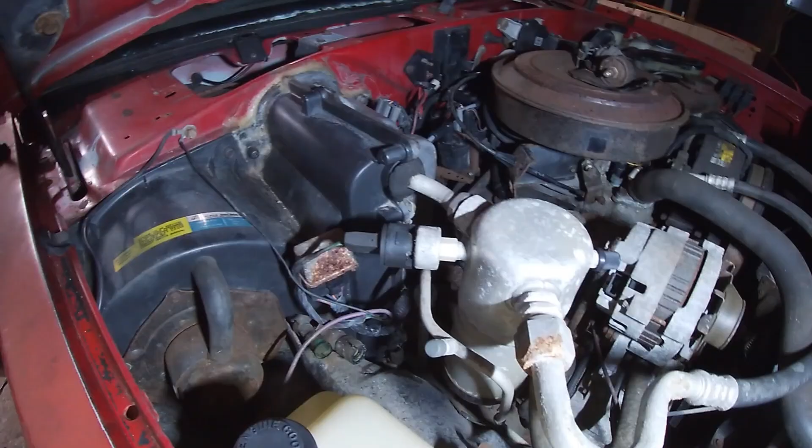Let's get to it. So I'm going to start on this heater core replacement. I've looped the one hose and I noticed a couple things. One, the bottom hose there, the clamp, the screw part of it is pointed down towards the inner fender. So I don't know how this guy got this heater hose on, or the factory did. It makes no sense to me.

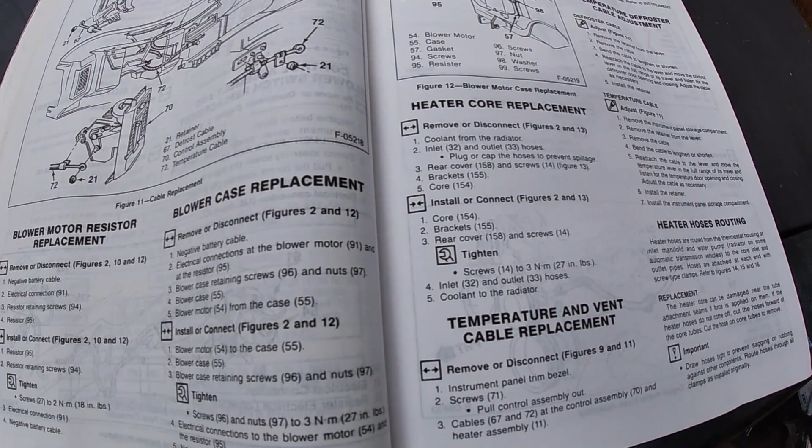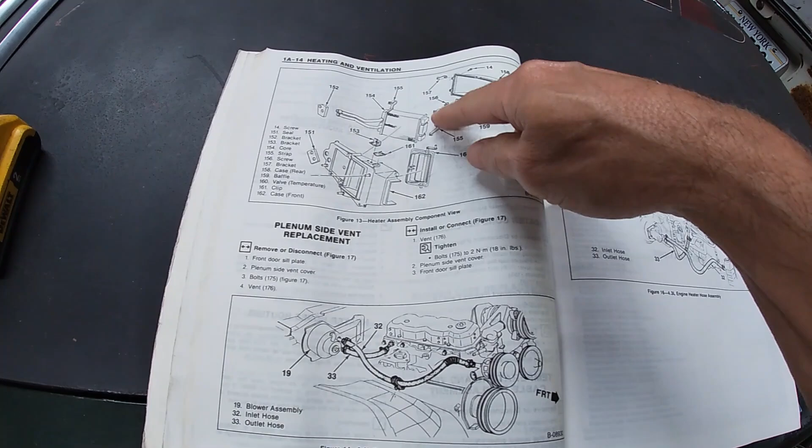Second thing is, I'm going through the manual just to make sure I don't miss anything. Heater core replacement: coolant from radiator, inlet hose, outlet hose, blah blah blah. Rear cover, screws, brackets, core. So when we look at the picture, remove the rear cover. This is the front of the vehicle. The brackets, the heater core. Simple. I'm not sure if they're forgetting something, but...

If this is the cover in the diagram, it's straight up and down. So, I mean, obviously the core is right there, behind there, but this dash comes down awfully low. So, we'll see what happens.

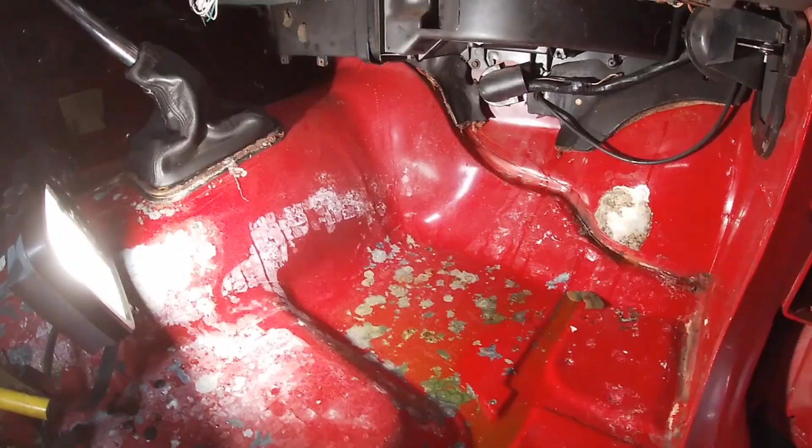Yeah, it quickly became apparent how naive and stupid I am. There's no way to get this out without either taking the dash out or accessing it through, there's an access door, you just unscrew that. But I watched a couple videos, and the 2 bolts that you need to get to by taking out that access door are not very accessible once you take that door off. One's down to the right, one's down to the left, kind of behind the radio.

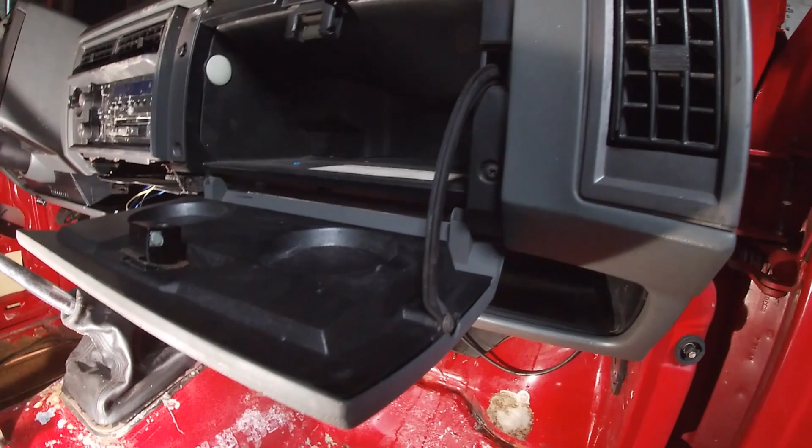So like I said, I watched a couple videos, and some people were taking out the radio. Some people were taking the dash out. And then some people were saying, oh no, it's easy, you just take the top of the dash out, drop the steering column, which involves taking all those panels off under the column, and then you can pull the dash away, but I imagine you have to unbolt it because there's a bracket here. And then we're like, oh yeah, don't forget unhook the ECM as well on this side. And then other people were chiming in the comments that they forgot steps.

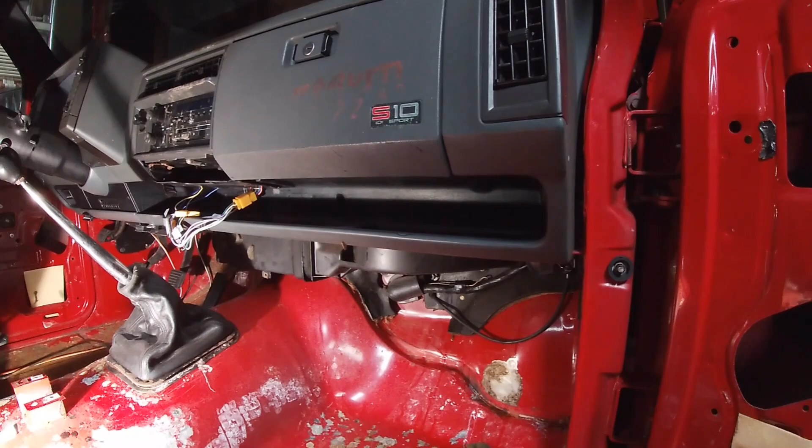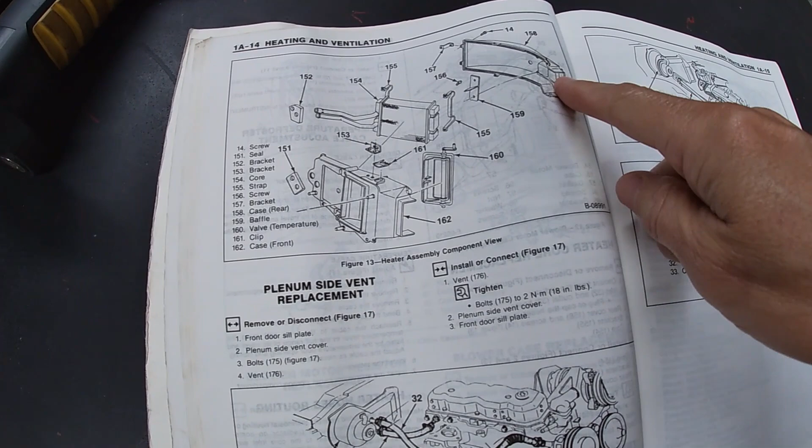So yeah, I'm gonna take that panel off inside the glove box and see what I can see. I mean, maybe I was expecting way too much than the procedure that just says take the cover off, take the 2 brackets off, take the heater core out. Done. I mean, I figured it was kind of behind stuff, but you know, they should probably mention, you know, remove the dash. What's the best way to remove the dash? What do you have to do? Do you have to unplug the ECM and drop the steering wheel? No mention of that whatsoever.

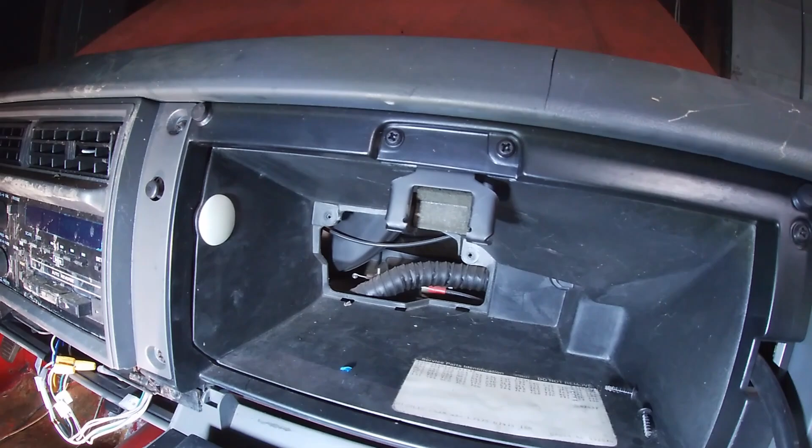There's the first one under the hose above the cable. And the other one is allegedly right down there behind the radio. I don't know what the point of this access door is. Alright, let's see if I can get these out.

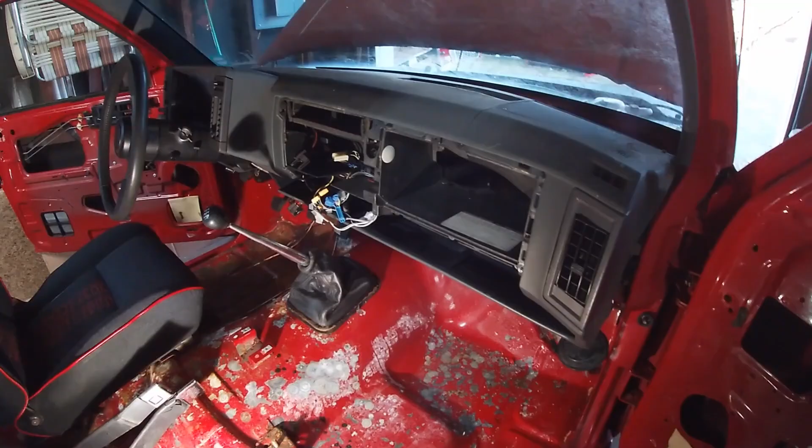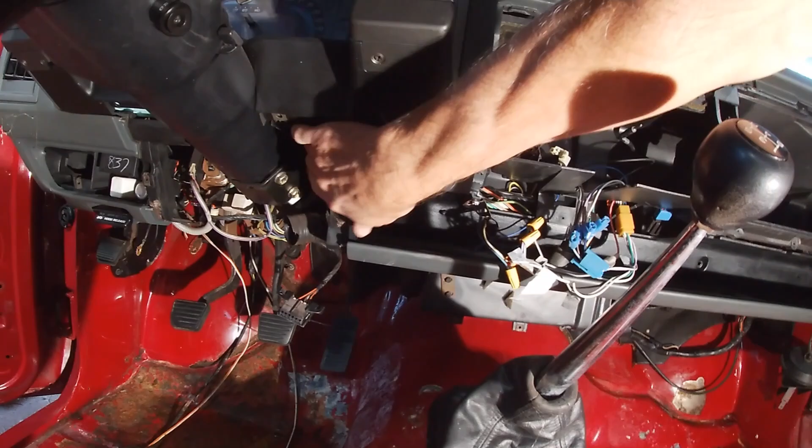In the center. Of course, I removed all the plastic on the bottom, and all of this, I had to take the radio out and all this stuff. All of this was to get the 2 bolts that you can't get to from going up underneath here to get that heater core out. Plus you need the room because when you take the cover off, it needs to clear the heater core.

So there's 1 bolt right behind the radio here on the right side of the radio. So that was easy enough to get to once you took the radio out. There's a bolt over there, which is hard to see. I think it's showing up on camera. It's right there where the bolt hole is because I have the cover off already. So basically you take this panel off in the back of the glove box, and that gets you access to nothing.

After removing all these bolts, I was able to pull the dash forward and push it down, and that exposed that nut, that bolt.

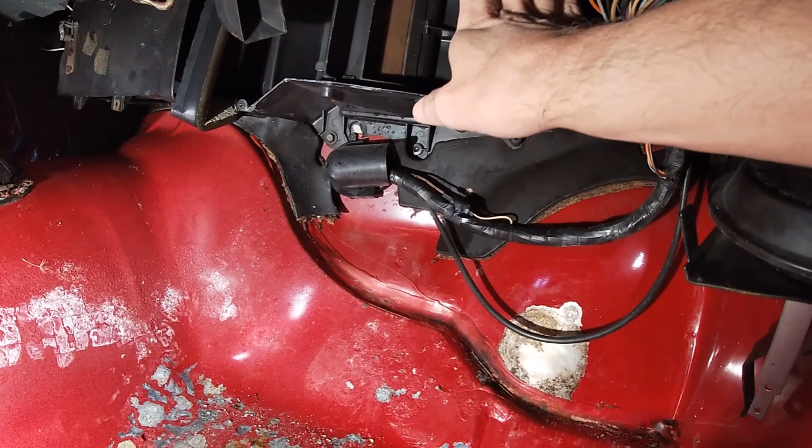When it came time to remove the heater core, you have to pull the cover out far enough to clear the heater core. It's stuffed inside the vent on this side, so you can't pull it out this way—you have to pull it from the right hand side. This vent actuator was in the way, so I took that off, and then it came out and I was able to drop it down.

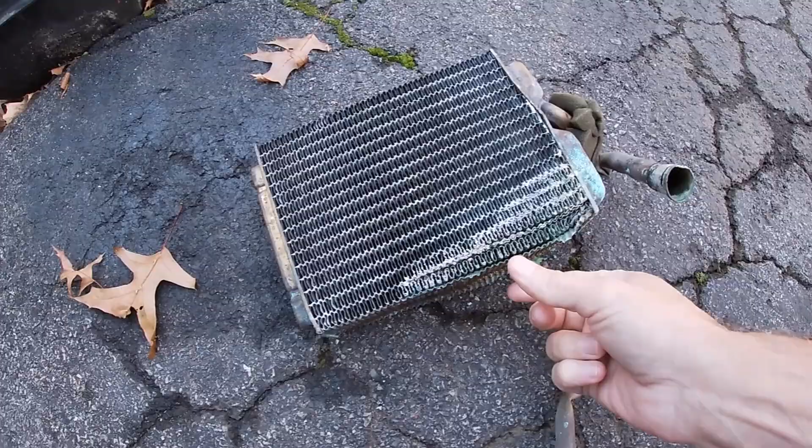I quickly realized the heater core was beyond repair. I was going to try to fix it, but the bottom had just fallen out of it—it was completely exploded. And this one tube, I don't know how it was put in, but the clamp, the nut side, was down on the inner fender. So I ended up pulling the heater core through and just cutting it off.

I also realized that when I bought this, the passenger side carpet was soaking wet, and I thought one of the windows must have been leaking, but there was no evidence of water coming in through the door, on the door panel, or over the dashboard. So I think that heater core had exploded at some point.

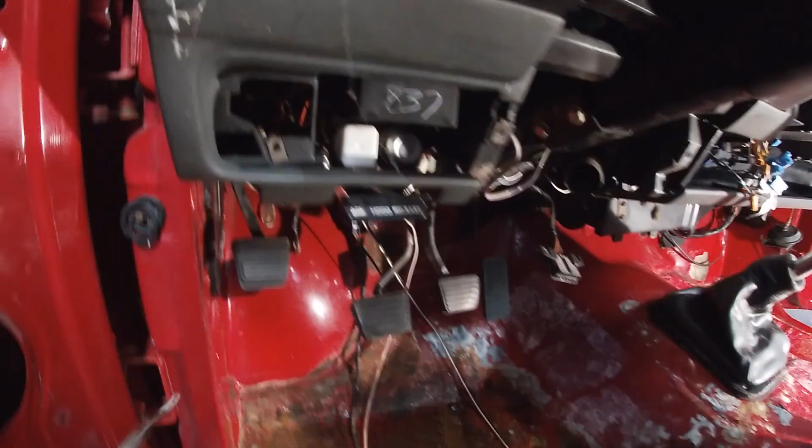Helpful tip on the brake release: to get this piece out so you can get this plastic out, pull the brake release, then look up underneath—the lever that releases the e-brake to come back up. Once you pull this, hold the lever with your hand and then pull this back out.

I don't understand—the panel that goes here covers this and goes under the steering column, and then there's another panel under that. So in order to change this flasher and this relay, I'll have to find out what these are actually for. You either have to take off all these panels or come up from behind, and I'm not even sure you can get to them, because there's a little metal panel holding these. I'll have to look into that and replace them now.

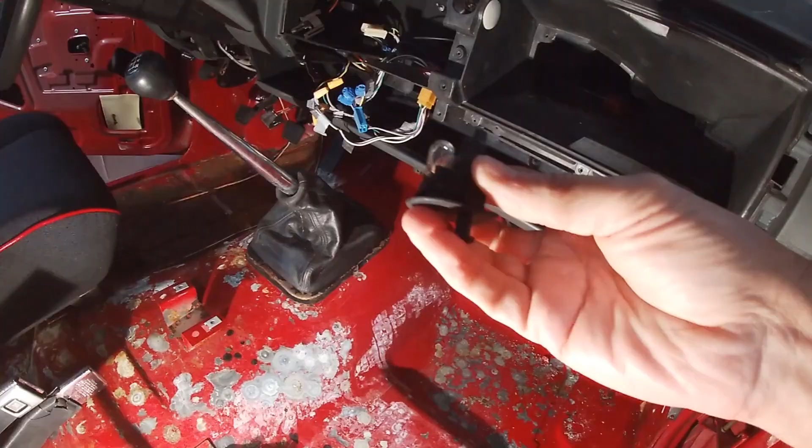Another problem area was this light for the glove box—it's in the dash here, and the button activates when the door shuts. This connector was a real pain to get off, and I wasn't sure which way to attack it, because there are clips here and clips there. So I went with the connector on the wire, and it's really sketchy because this plastic is so brittle. But I managed to slip it off.

That's probably why all these parts are worth money, because they just break so easily—like underneath here, these are all broken. The panel I took off under the steering column had its screw mounts broken, but I have the pieces, so I'm going to try to glue them and reinforce them with duct tape or something on the back. We have more of these connectors, obviously used to run more speakers. These are the worst connectors, where you snap them and they splice the wires—they're just horrible.

So that's coming out. Now that fixing this heater core isn't going to happen, I have one on order. It's aluminum, where that one was copper, so I'm hopeful—new parts are sometimes garbage, but we'll try it.

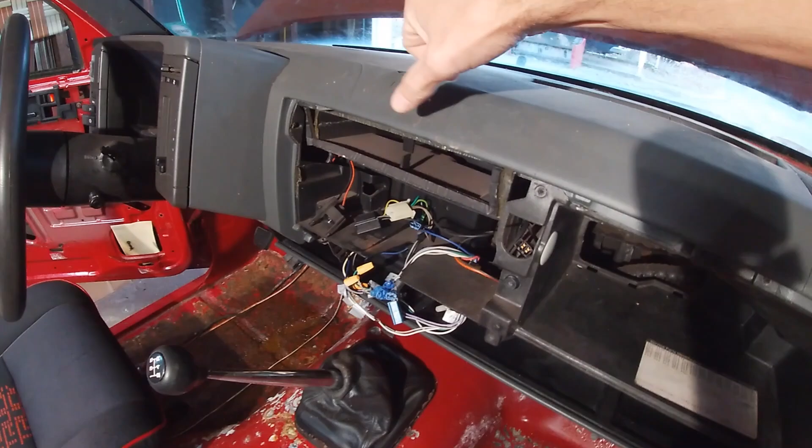So we're probably all thinking it, and I was thinking it too—now's the time to replace this dashboard. There's a crack here, and it looks like someone either threw a fit and was punching this, or something, but there's cracks here, stuff missing, a crack here, and another crack on the other side where the speaker grill is. These dashboards turn to brittle plastic, so they're difficult to find, and when you do find them, they're $300, $400, $500, and I don't want to spend that kind of money on this dashboard.

Now's the time to do it, but I don't want to do it now, because I want to get this thing on the road and driving. So I'm going to clean this and live with it. It'll be fine, it'll be functional. Someday down the road, when I regret not doing it now, I'll probably replace it.

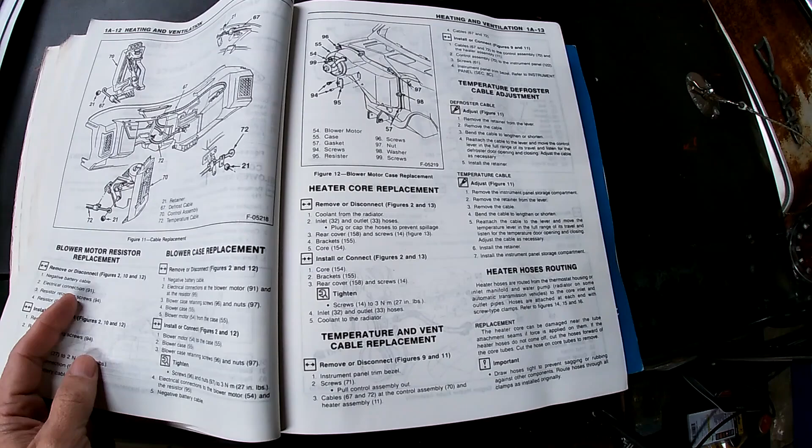Who knows? I just want to show why I hate this manual so much. First of all, it's 3 different manuals, plus one that I didn't know I needed for the fuel system, which I don't have. But heater core replacement: remove or disconnect.

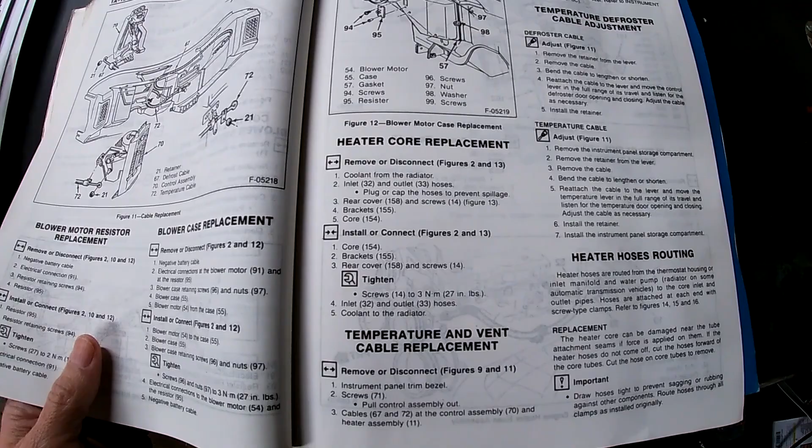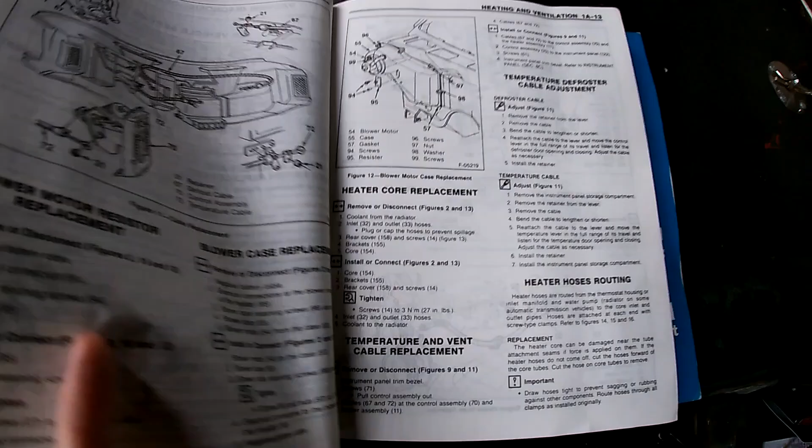Here's figure 2, and 13 is just the heater core cover. We've got 151 to 162 and number 14 on the diagram. Coolant from the radiator, inlet 32, outlet 33. Plug or cap the hoses. We all know what the hoses are, that's not the point. So figure 13 doesn't have 32 and 33, so figure 2 - no, figure 2 doesn't have it either. It's actually on, well for me, figure 15.

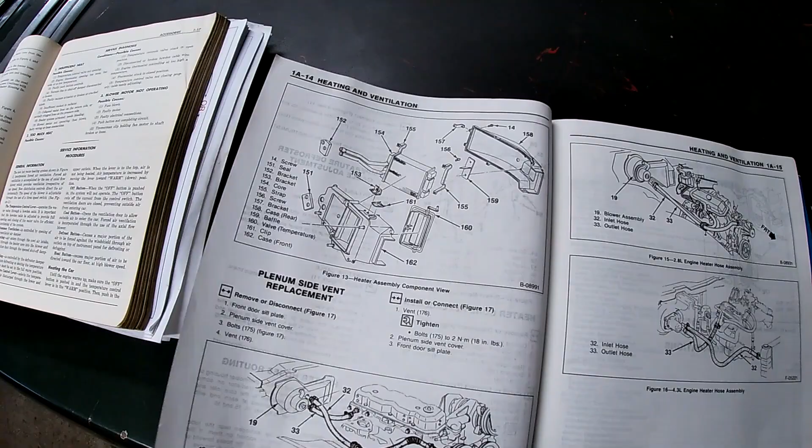So we'll continue. Rear cover 158 and screws 14, figure 13, which we already saw. Self-explanatory. Brackets, core. Boom, 5 steps.

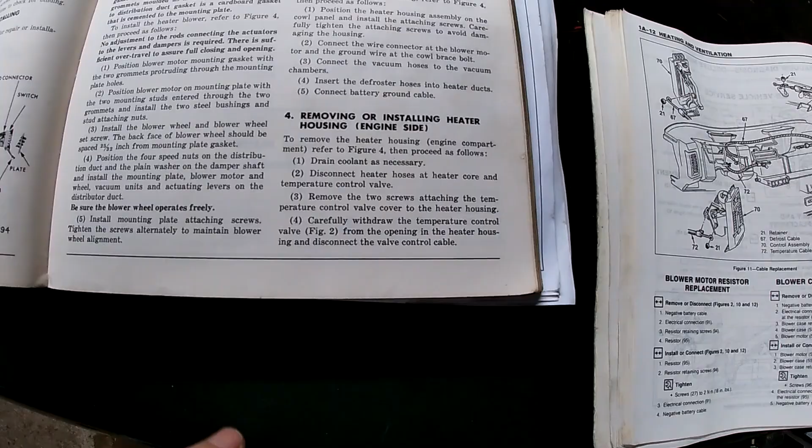Here's the manual for my 62 Dart. Removing or installing heater core. To remove heater core, refer to figure 4, then proceed as follows. Perform operations 1 through 7 under heater housing removal. They actually divide the heater housing removal into 2 different parts: one from the driver's side, the driver compartment, and one from the engine compartment. And here we go, pretty self-explanatory. Remove 2 screws, carefully withdraw the temperature control valve from the opening, disconnect heater hose, remove water valve, remove 10 screws attaching the heater core housing to the cowl panel, blah blah blah.

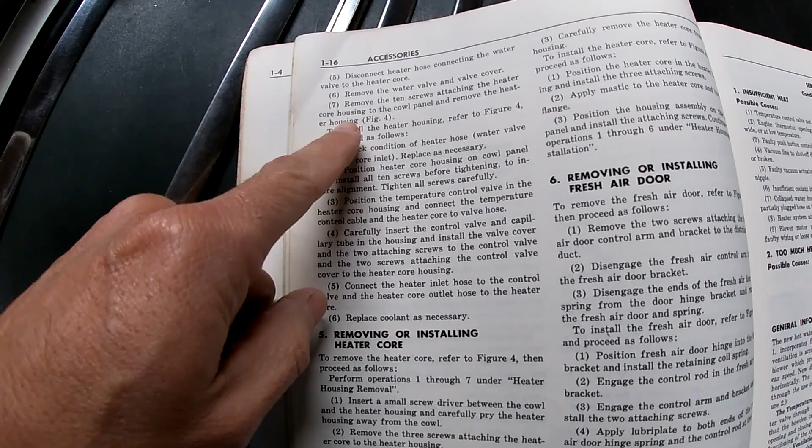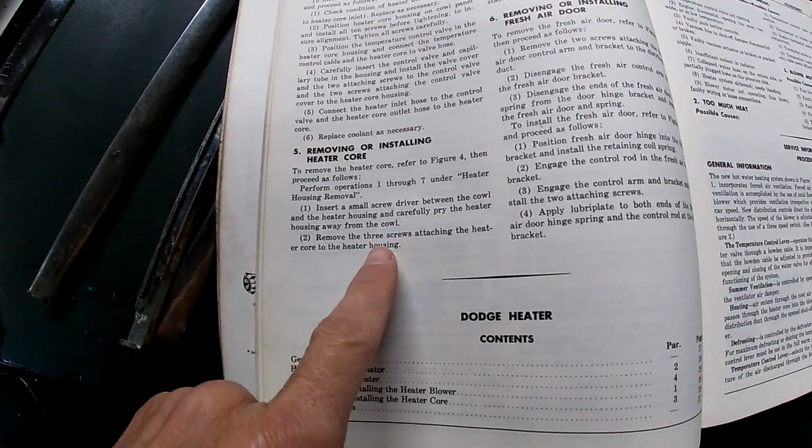Back to here. Insert a small screwdriver between the cowl and the heater housing and carefully pry the heater housing away from the cowl. Remove the 3 screws attaching the heater core to the heater housing. Carefully remove the heater core.

So it's a little more intuitive and step by step. You know exactly how many screws you're removing. You know exactly how to remove it by carefully prying. Nice diagram with actual picture-like images, where this is like, I don't know, Fisher-Price coloring book kind of drawings.

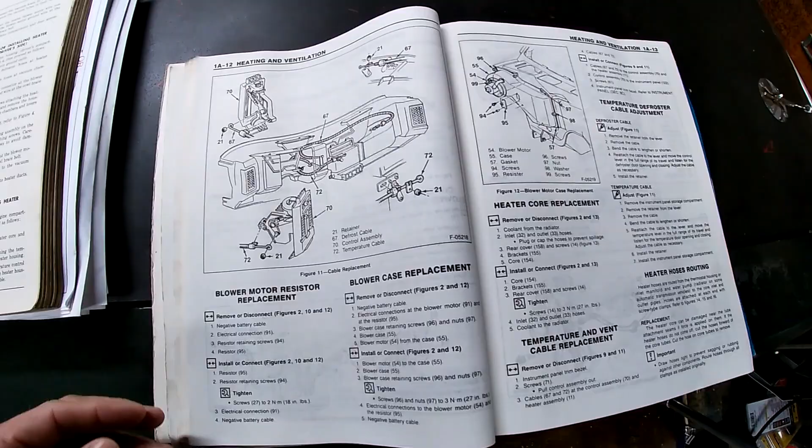This book is so cool. Look at these pictures, probably drawings actually. There we go, where am I? There we go, 440 2-door hardtop.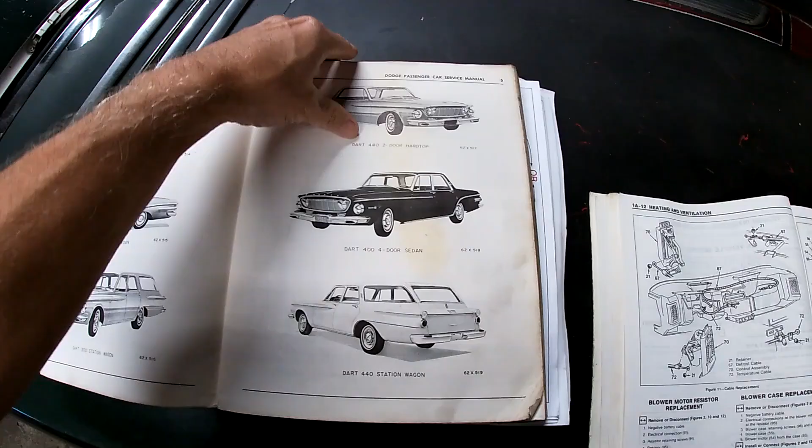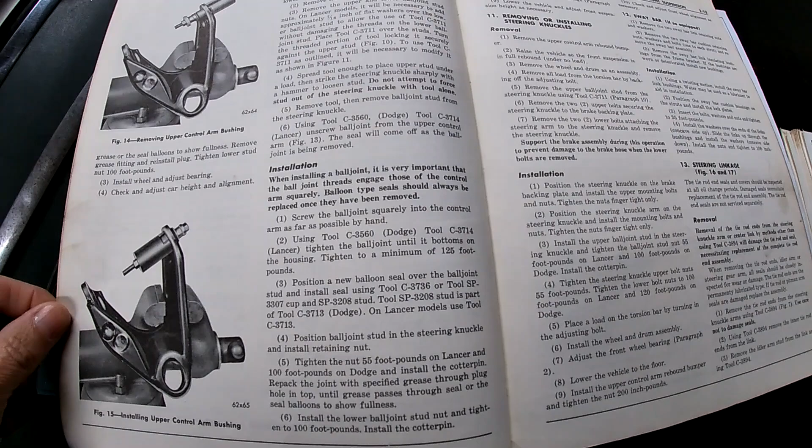I use this for my Valiant as well, because the Lancer is basically the Valiant. Look at that, huh? Just so much detail in here. The pictures are just so good. I like this. When I did the front suspension, I was looking at this, and they actually give you tool numbers: using tool C3560 for Dodge and tool C3714 for Lancer. Not that I had these tools, but it's just a nice detail. And I could go on and on with this book.

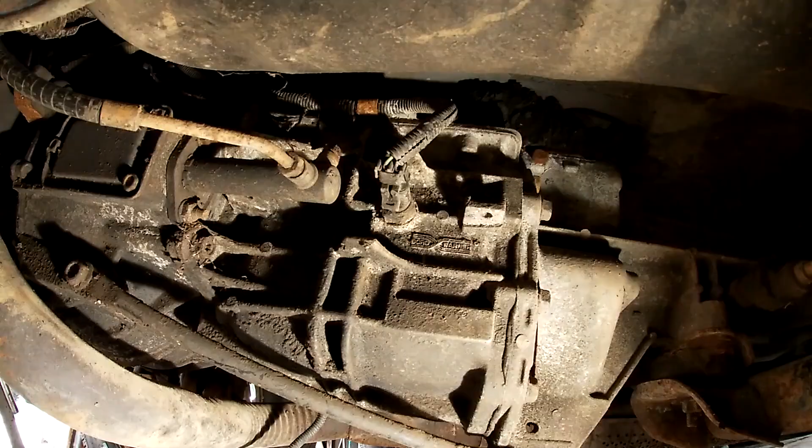It's another day. We're back on the 88 S10. Today's goal is to get it to move. So I need to do some clutch stuff and some oil stuff, and we'll get into it, but first I need to get it up in the air. Step 1, I'm going to remove the line from the clutch master from the slave cylinder, then I'll take the slave cylinder out of the trans. Everything so far is 13 millimeter.

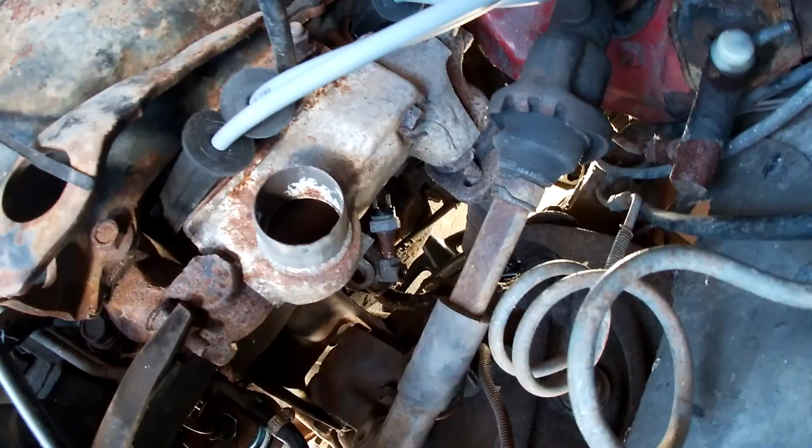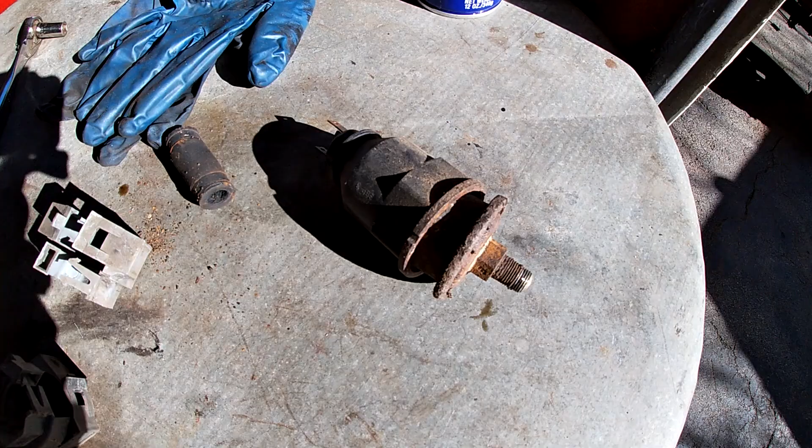So there's the oil pressure switch, which I couldn't get off because I need to get vice grips on it because the oil filter was in the way. Plus I had to take off the switch for the oil pressure gauge because it's not just a light, it's a gauge. I wanted to make sure I ordered the right switch. This is the correct oil pressure switch for the gauge, it's actually listed as the rally gauge. This one was broken in half, but I wanted to make sure I had the right one with the 3 prongs. So all this means that in order to make sure this thing moves, I need to actually replace the switch, so I might as well replace the other one while I'm at it. And I have to take off the oil filter to do that, so I might as well change the oil. It's the whole snowball effect.

Next up is the clutch master cylinder, which are those two nuts there, and there's a little clip for the pedal. I noticed the clutch pedal has some movement side to side, it's probably got plastic bushings, but that's something I can deal with later. Problem is the line from the master down, it's so rotted onto the master I can't really get it off or get to it. And this rod, there's like a clip inside, so we'll see if we can get this out of here with the line attached.

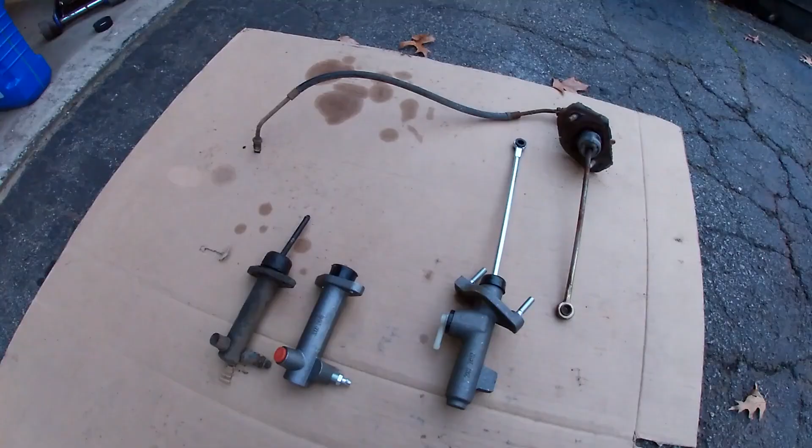Looking at old versus new, the clutch master cylinder still pumps, but it's full of rusty garbage, and it's all rusted around this grommet. It's not worth trying to salvage, but the good news is the new one seems to have the same configuration.

This thing will spin around so I can point it where it needs to be. It was just like this in the package. The only thing I noticed is the old one is flat and seems to have a gasket or remnants of one, where this one is not flat. I might have to make a foam gasket for this one.

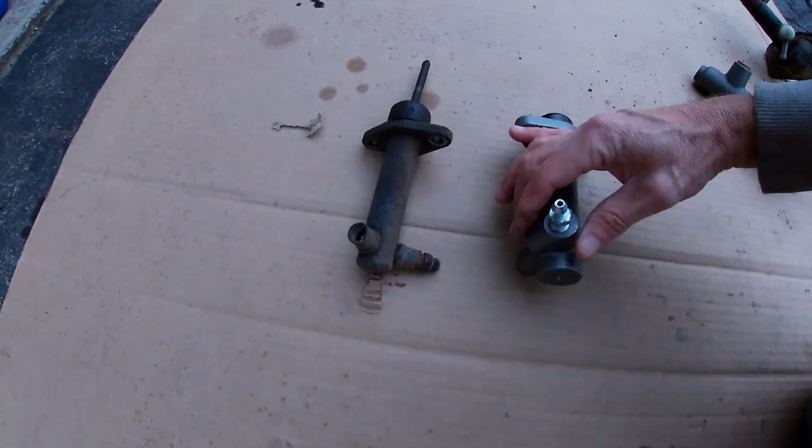The cylinder, same configuration, came with a new rod. Although this section seems a little larger, it's still pointed in the same direction. So I got everything in, got the slave cylinder in. Even though it's the same configuration, everything's pointing in the same direction.

The bleeder on the new one is higher, and this thing is larger. So I put a rubber cap on it and kind of pushed it up so fluid can come out. But as you can probably see, it's just shoved way up near the transmission. You gotta unplug this thing to even get to it, to loosen it.

As far as this goes, I ordered the longer one because it was easier to get. The shorter one, I don't know if the bends are different, because it doesn't exactly fit like the original, but nothing does. So I'll be keeping the original parts just in case. Maybe I can find a rebuild kit if this stuff doesn't work out.

The new clutch master cylinder is in. That went pretty easy, as well as the new oil pressure switch for the gauge. It's ridiculous how that's set up - it's even hard to see, but the black thing's for the gauge, and then there's the switch for, I don't know, probably detecting pressure for the ECM.

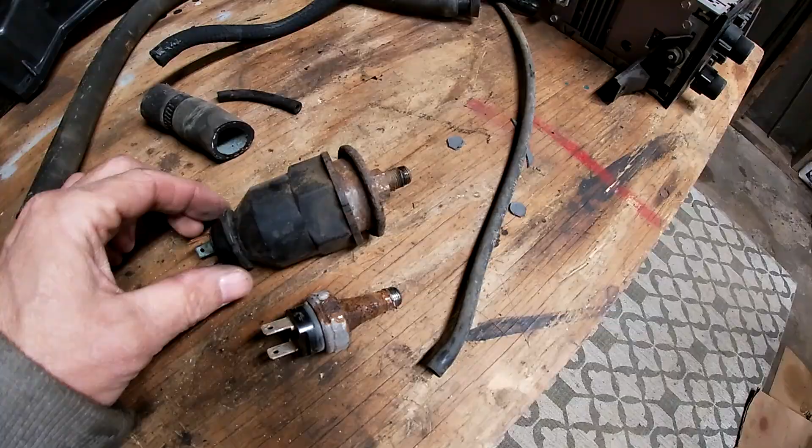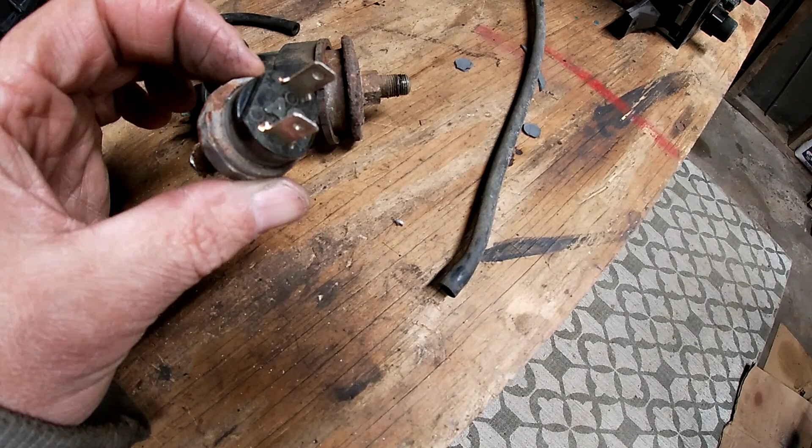Unlike the oil pressure switch for the gauge, this is actually not even in millimeters - I think this is 9/16. It's one of the few things that's not millimeters. But it has the nut thing on the end so you can actually turn it, where this doesn't. My assumption is there's some kind of special wrench or socket to fit this, but you couldn't get a socket on there unless you pulled the motor, so I don't know what they were thinking with this.

I'm going to let this thing gravity bleed. The slave cylinder, when you put it into the transmission, pushes all the way in, so it doesn't really accept a lot of fluid. It's getting cold here, of course, because that's where I live, and I haven't put heat in this garage - not that it would hold it anyway.

So we're working as fast as possible. And of course, this has become a workbench, which I hate doing when the cars are workbenches, but when you're short on space, you gotta do what you gotta do.

Here we are next day. I think I'm ready to see if this clutch works. I've charged the battery, changed the oil and oil filter, done the oil pressure switch and the other switch, done the clutch master and the hose here, then the lower hose, and then the slave valve. I know the first time I ran it, it seemed to idle really high - I don't know if that was because the air cleaner wasn't on and certain things weren't plugged in, or if it's something like the IAC.

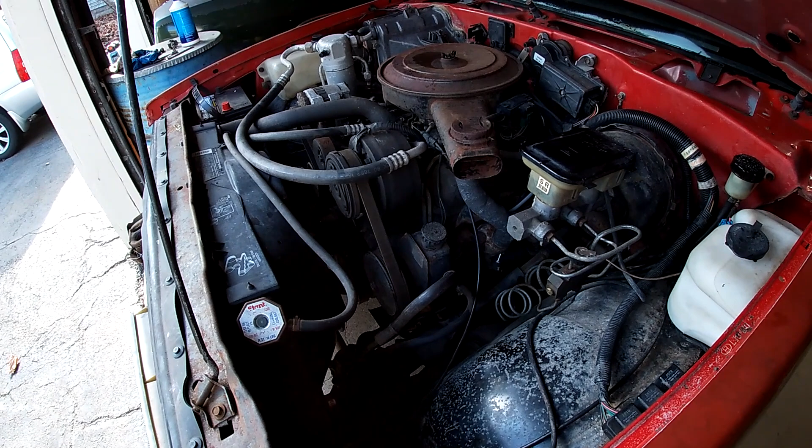Who knows? But if something's faulty, maybe we'll get a code that we can decipher. Engage. Okay, that oil pressure should read correctly now.

I don't think the RPM is reading correctly. I know the battery's not charging because the alternator is not hooked up.

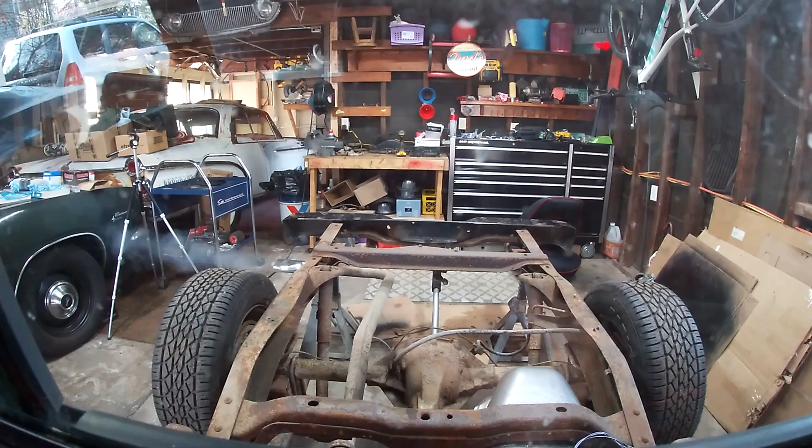Let's see if that axle will spin. Brakes work, somewhat. Let's go for a ride.

We can't go for a ride because, like I said, the alternator is not charging and the battery's dead. So for some reason the plug to the alternator is missing and all these wires are cut. I don't know why, but surprisingly, one of the few things that's made for this truck is the alternator plug. I found it on Summit and a bunch of other places. It was like $70, $80, but Napa had it for like 20 bucks shipped to my house.

I'm gonna grab the wiring diagram, see if we can figure this out, charge the battery up, and then we can go for a ride.

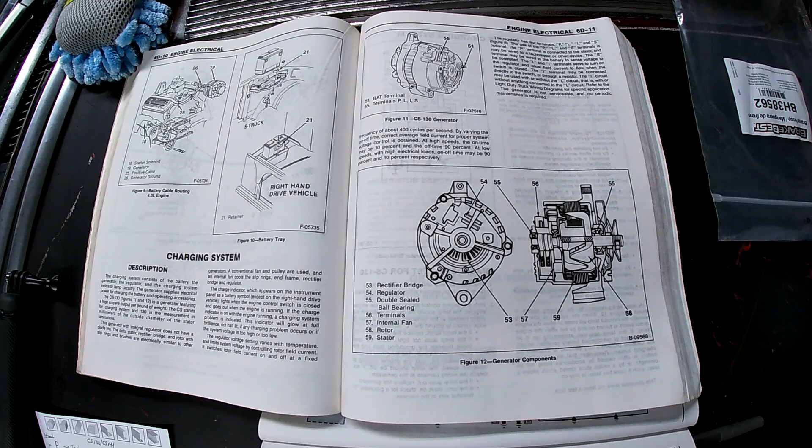So I'm trying to get this alternator to charge and hook up that new pigtail, but I don't have the wiring diagram as far as what wires go where. So I have a brown wire and a pink wire with a black stripe. And the connector has 4 connectors, but only 3 of them in the actual pigtail.

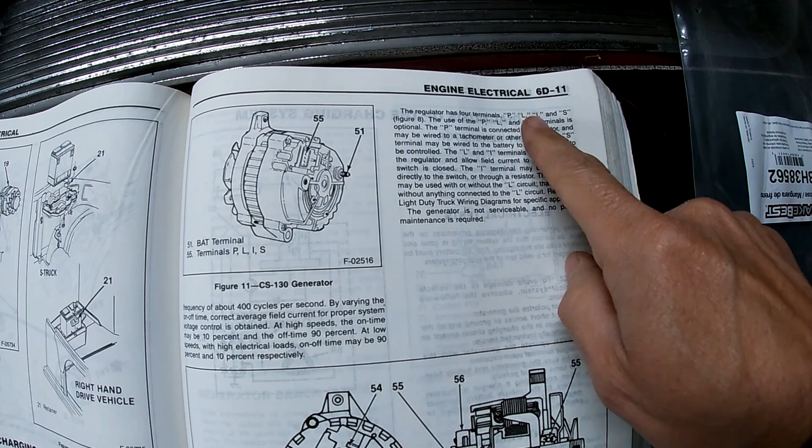So I was lucky enough to find this. The regulator has 4 terminals, P-L-I-S. And then it goes through what each is connected to. It says refer to the wiring diagram. So starter and charging, 2.8.

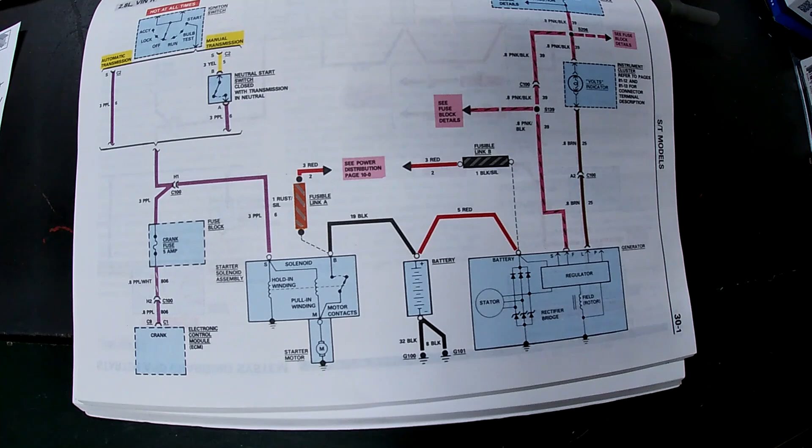P-L-F-S. Now the issue is which one is P, which one is L and F and S, because the connector has a large connector on one end and then the other 3 are small.

What I do know is pink is for the tach, which sounds strange to me, but the pink wire is coming from the gauge cluster. So this is the cluster with the fuel gauge, voltmeter, and tachometer. It doesn't have dummy lights. So it says without tach, pink wire. With tach, pink wire. My understanding is the voltmeter, if it's just a dummy light, that's the resistor.

If it has a gauge, I believe the resistor is a light next to the voltmeter. No one's actually explicitly said that. I can't find it in any of the documentation in these manuals, but that's what I'm going with.

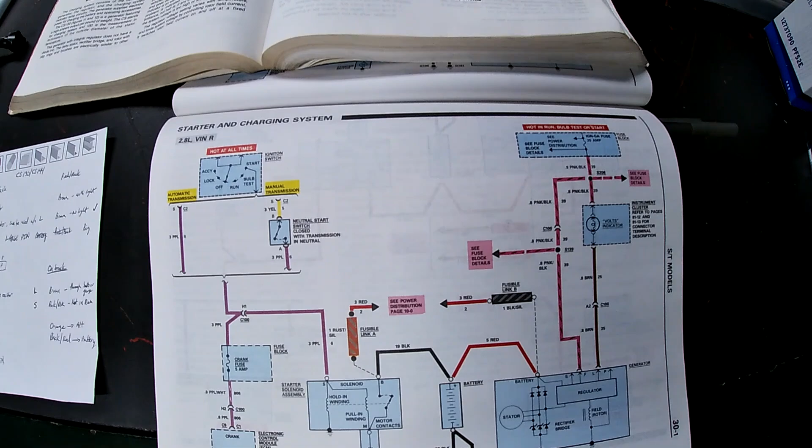So I'm going with S as the large connector, which apparently I don't need because S would be battery power, and battery power goes to a different connector on the alternator. So all I need is pink and brown.

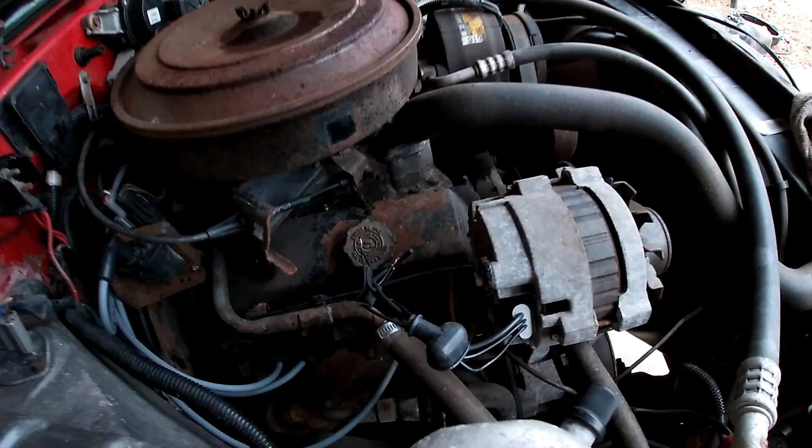So here we go. I got pink and brown temporarily wired up to this connector. So from what I can tell, I don't need the large gauge wire going to battery power because I already have a wire going to the battery.

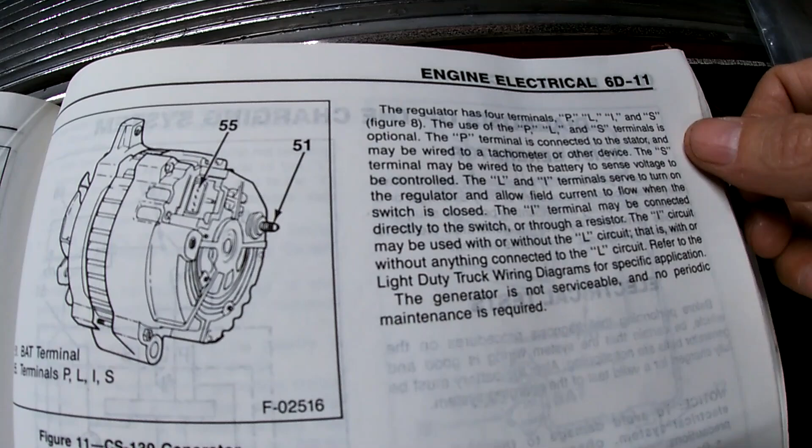Plus, it's not on the diagram here under S. The S terminal may be wired to the battery to sense voltage, maybe. It actually says P, L, and S are optional. I is the only one that's not optional, even though I and L are the same thing, or F and L, depending on which book you're looking at. They're both labeled S10. Needless to say, my frustration is great.

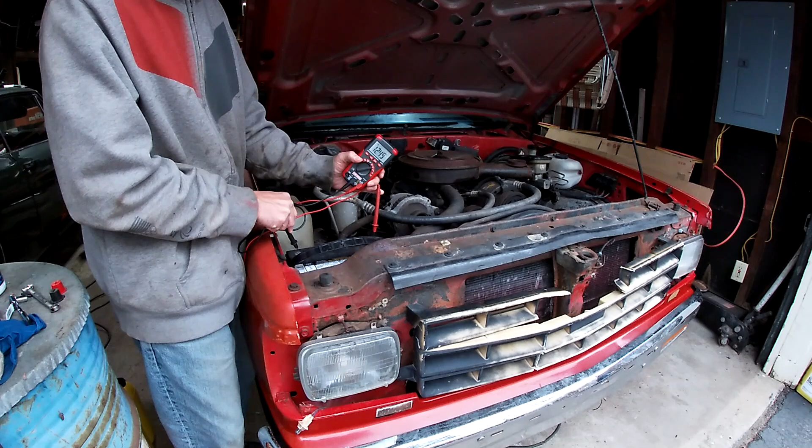So I'm going to hook up the battery, unhook the battery charger, hopefully it starts, hopefully it charges. 12 volt. I don't think that's enough.

Front brakes are stuck, but it moves, it stops. It is definitely not charging. I don't know if it's the alternator or I've got the wiring hooked up wrong, but the brakes work, power steering works.

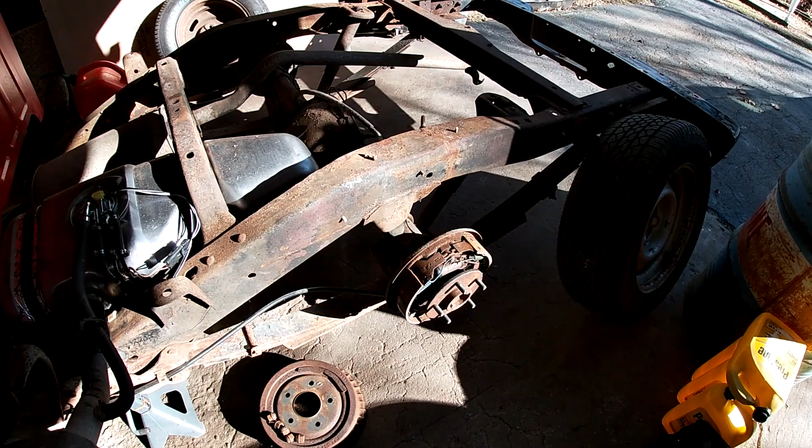Brakes. Let's talk brakes. So, front disc, rear drum. The rear drum, they seem fine. They work, they look to be fairly new. I did decide to replace the wheel cylinders. I just don't want to have to deal with it later. I peeked inside, they look okay, but everything else looks really good, so figured why not. I got the rear brake hose for it.

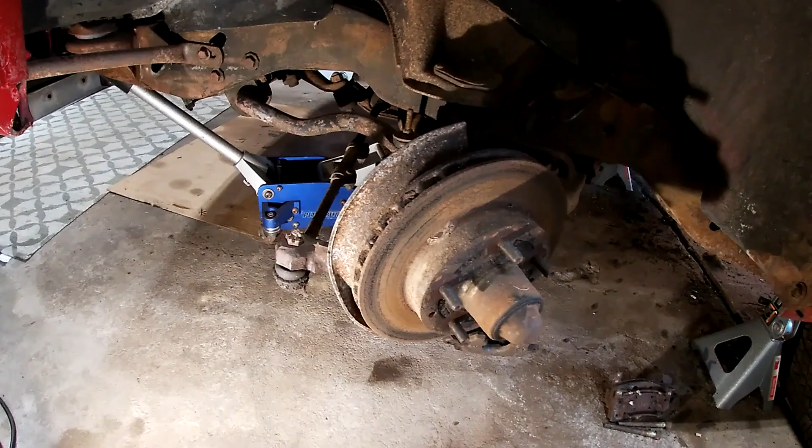Front brakes, a little bit of a different story. Obviously I'm going to replace the brake hoses. The discs, I don't know. They're kind of thin on one side. The pads have a lot of meat on them. I think this truck was serviced before it was parked.

The calipers, you know, I could probably clean them up. They would probably work fine. I might find some rust in here. I don't even know if you can get seals, but I could probably rebuild them.

Passenger side was a little worse as far as it was just locked up, but that's probably a lot to do with the brake hose. It's probably all collapsed inside, and the fluid can't return from the caliper. So, not a big deal. The disc kind of suffers from the same, thin on one side, not the other, but workable.

The master cylinder, like I said, the brakes work. So it's nothing terrible. The only thing I was worried about with this was, you know, this piece is just kind of deformed. I don't know how well it would seal.

So I tried to order this new, but you can only get it for manual brakes, and it's different. All the lines look really good, I don't see a lot of rot. So in the end, I decided to replace the rear wheel cylinders, obviously the hoses, and I'm just redoing the front brakes entirely. And I also got a new master cylinder.

The main reason is because the kid's going to be driving this, so I don't want to have any issues. The other reason is it's starting to get winter here, getting cold, and if a seal breaks on a wheel cylinder or a caliper or something goes with the master, I don't want to deal with it when it's negative 100 degrees outside.

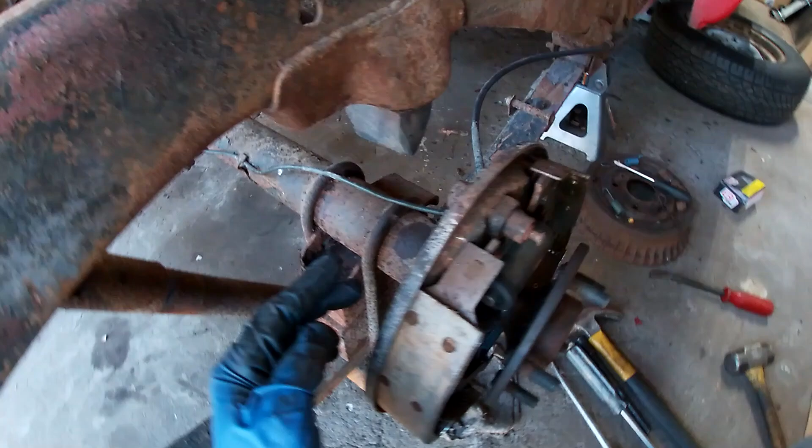I was replacing the rear wheel cylinders, thought this would be the easy part, and I immediately started taking this nut off, and then I realized that's not holding them on. So I opened up the package, and there's a clip on the back. So here's the new clip, here's the old one that I mangled.

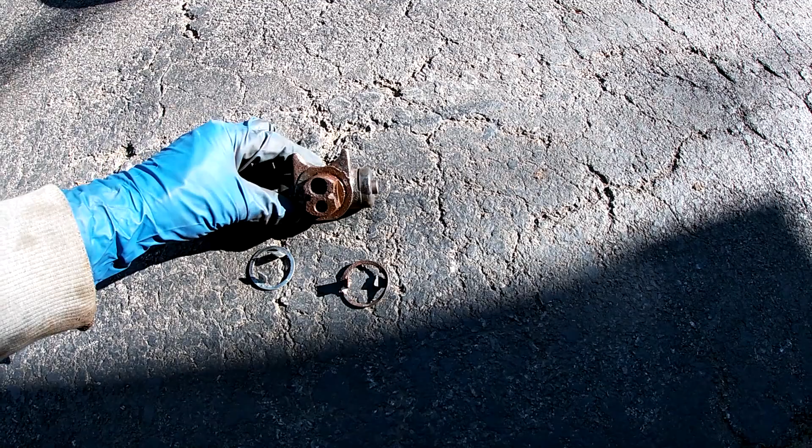Basically, once I got it off, I kind of realized that when this is on, you can take a nail and put it in this groove and then bend this clip out, and then it just kind of pops off on the inside. So here's the kicker.

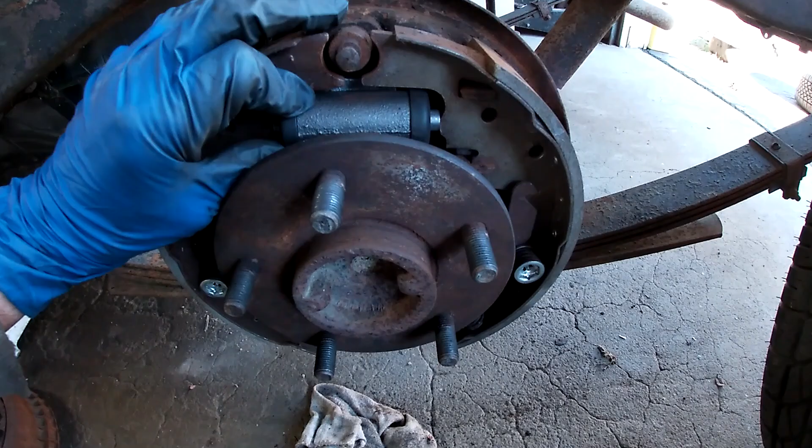This one is a little loose, which I don't like. This side was even worse, so I took it off and I put the one remaining old clip I had, and it is rock solid. It is not going anywhere.

Back on the brakes today. I got the rears done, got the wheel cylinders in and the new line. Fronts are completely disassembled. I'm working on the master.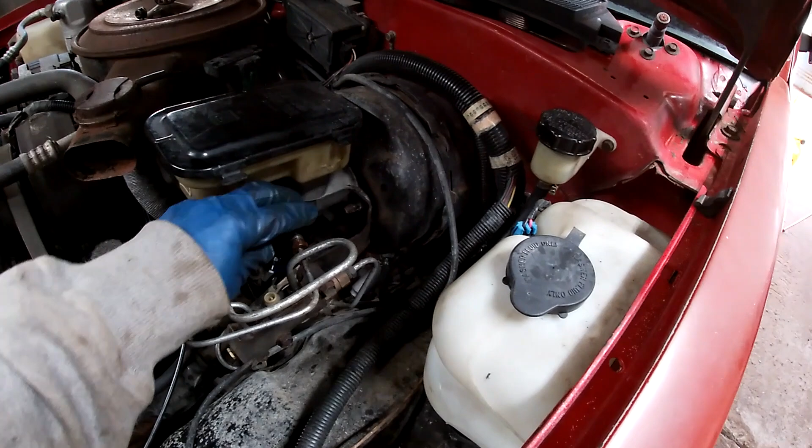So these came free pretty easy, but they're stuck to the line. So I managed to get this one unstuck because this nut has to spin on the line. So this one spun, this one didn't, this one didn't. I got this one to spin.

So we're gonna pull this off, bench bleed the new one, and continue on these front brakes. Last thing I want to do is just twist this off and twist the brake line. It's still good, it's just a little stuck.

Every time I do this, I wish I had a nice set of brake line, gas line wrenches, and then I completely forget about it and never mind.

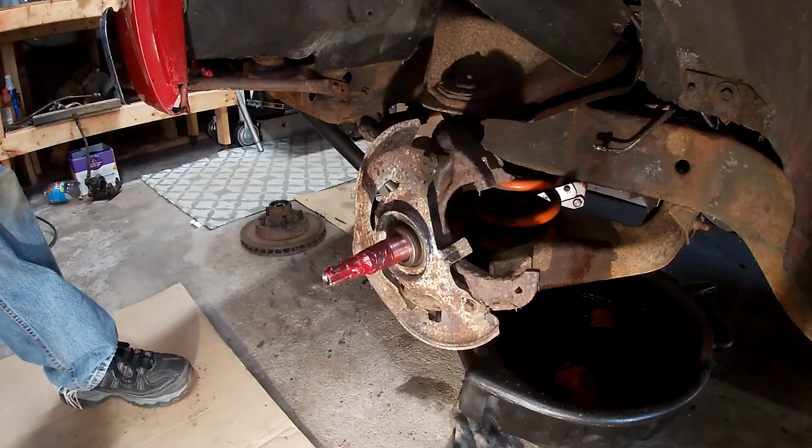Rotors are clean, bearings are packed, everything's greased up, seal is on. So one thing I noticed was the outer bearing has like a Teflon cage, which I've never seen before. The originals I pulled off looked the same. I actually thought they were worn down because, as you can see, there's more of the roller on the top than the bottom, or maybe you can't.

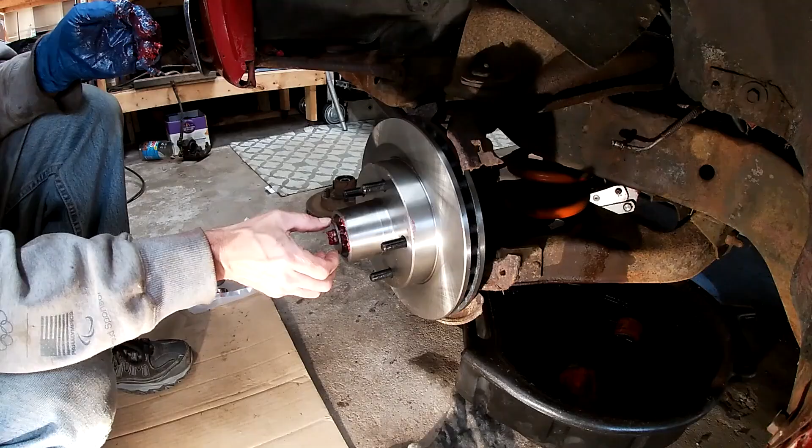Washer, nut. I usually go to tight and then back it off like a quarter of that. What I'll do is put a dab in the cap and just clean my glove off with it, just for a little added grease in there. Tap that sucker home. Don't forget the cotter pin like I did.

I'll do caliper first. There's a clip that comes with the pads that you just clip on the inside pad. I just use anti-seize on everything, it works fine. There's two ways this line can come out of here, this way, at least on the new ones, it can go out the side. So you got to make sure it's the same because it'll bind up.

I really don't like these clips, like screw on. I like the ones that actually clip on, because you just clip them on. These are very difficult to get off when they're rusty. Bracket, tighten up the line, tighten the caliper.

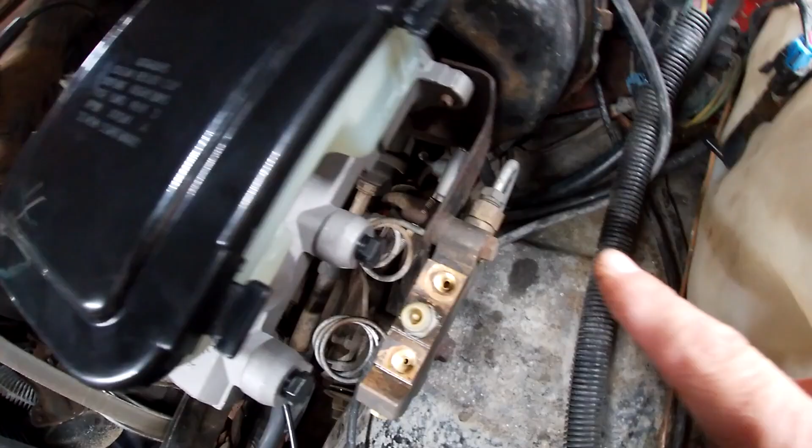Freshly bled master cylinder, which by the way appears to have the same gasket under the cap as what's pictured for the manual brake gasket, which I was just going to replace that, but whatever, pictures could be wrong. Of course, these are the cone shape studs where there's no thread at the beginning, and you got to compress this master to get it on. Fun.

Okay, I'm stupid, this goes on first. I am a dummy, look how much easier that is when you do it right.

I freed up these lines, just got to put them in the right spot. The instructions on this say to bleed the line closest to the master first. I've never heard of that. I mean, I bench bled it, so I don't see why there would be an issue.

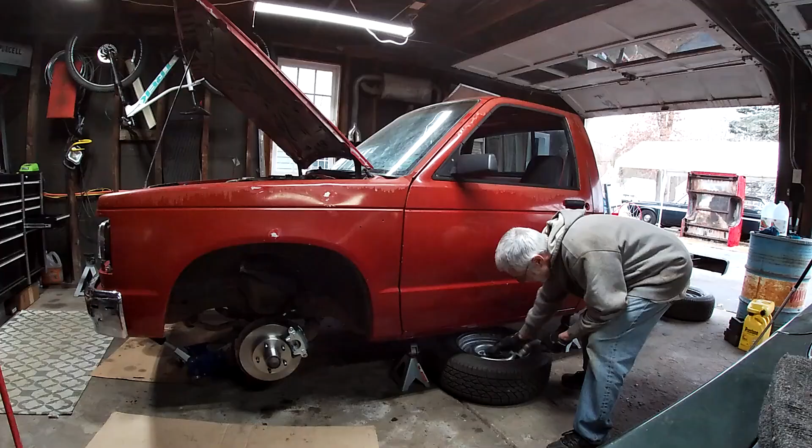So we're just going to start at the farthest. I just need to phone a friend. Brakes are bled, no leaks. Get this puppy back on the ground and see what happens.

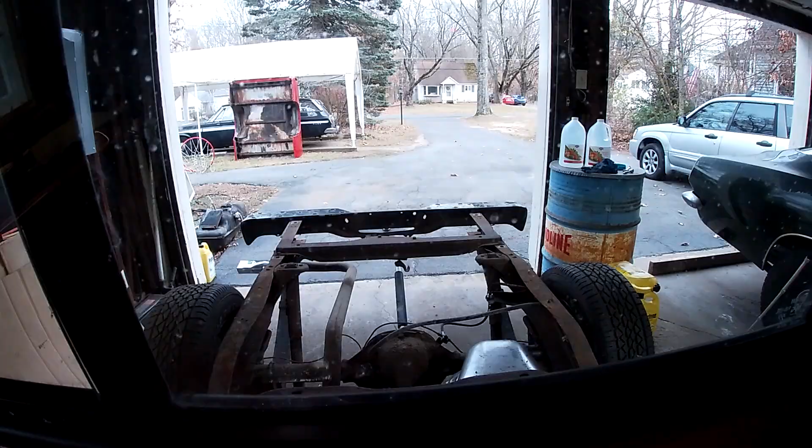Before I set that rear down, I'm going to test the rear brakes. See what happens. Hear that hissing sound?

I don't know what that is. It idles a little bit too high. My understanding is the temperature gauge can affect that, because that kind of tells the IAC what to do. And the temperature gauge wasn't working, so I replaced the sensor and we'll get it out and heat it up and see what happens. But I also bought an IAC just in case.

Stops better than a new car.

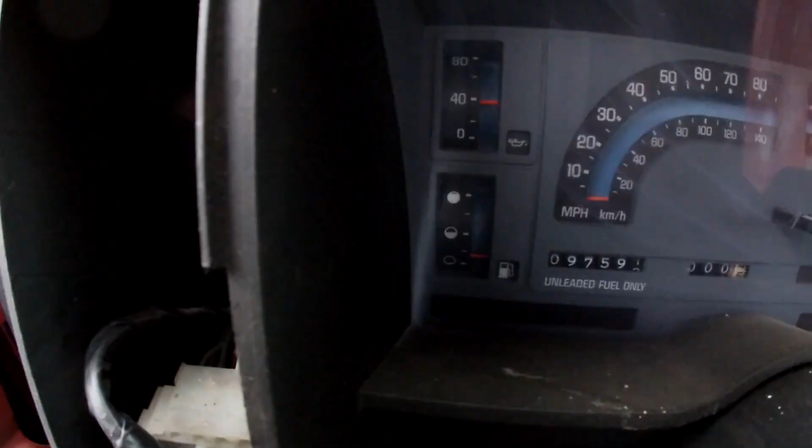I put 5 gallons in it, so a quarter tank roughly. That seems right, it's up from nothing. Oil pressure looks right. Battery, if that's right, it's not charging enough. And the temperature gauge doesn't seem to be moving, and I just replaced the sensor. It's got to be more than nothing.

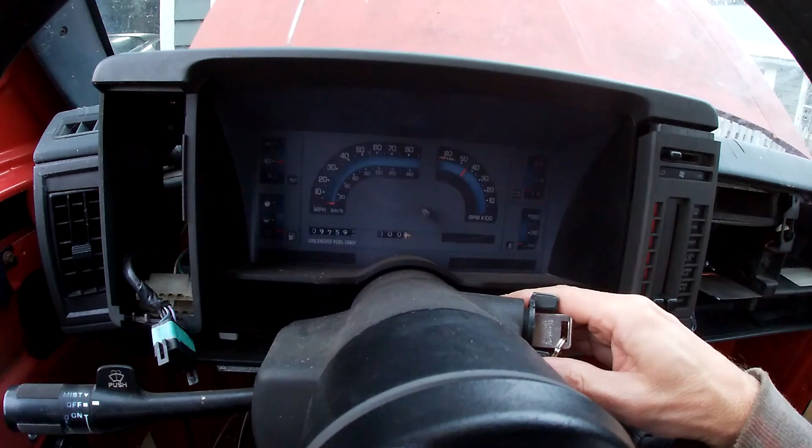I don't know what that hissing is.

The floor. Time to address the floor. I was going to put it off, but I want to get this interior back together. And before I clean up this dashboard and the windows and everything else, it's time to make a mess.

So this floor is not rusty, as we've covered before, but the truck is galvanized, and it appears that the air, or just being exposed for some reason, the paint's coming off the galvanized.

Like every day I can scrape more and more paint off. I don't understand. But...

We're gonna take off as much as possible. I mean, look at this. This was not like this a few days ago. It's completely flaking off. Since this was oxidation, and I looked it up, it's zinc oxidation.

So basically the galvanized metal is sacrificing the zinc in it to keep the metal from rusting. I get that. What I don't understand is why it's so severe, why this was such a problem for, you know, this past however many weeks or months it's been.

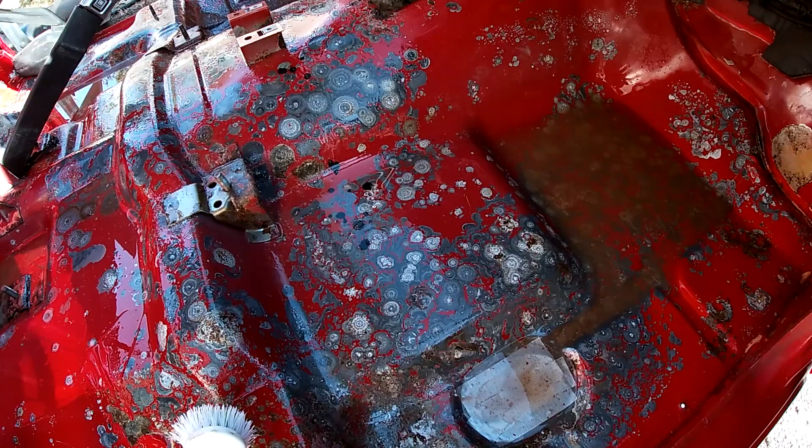I don't know. I had some white vinegar because I was going to use it in the radiator to get rid of some of the calcium deposits. So I figured I'd try it on this, and it immediately really seemed to knock it down a lot. I see a lot more of the galvanized than I do of the oxidation. Obviously it's eating at some of the rust too, which I'm okay with.

But I can't spend, you know, days on this, so I'm gonna let it soak. I've been brushing it, I'll come back and brush it a few more times, neutralize it with some water, and I gotta move on to priming and painting it and see if that sticks. Got a carpet on the way, so gotta keep this project moving forward, but it did definitely knock it down a lot, which is good.

And from last night to today, I don't see too much more of the paint flaking off, so hopefully this will at least make it better, if not completely resolve it.

Here's where I'm at. I scrubbed it with the vinegar a couple times. I let it soak for an hour or two, and then I went back and hit it with hot water and scrubbed it and cleaned it out.

There's an airplane like right above me right now. Look at that bad boy.

Okay, so I scrubbed it and all that, and I let it dry. I blew it out with the air compressor, and I came back to check it just to make sure it's dry, and hit it with the air compressor again just to make sure, and it blew paint all over the place. So it's like every time I address it, more paint comes up.

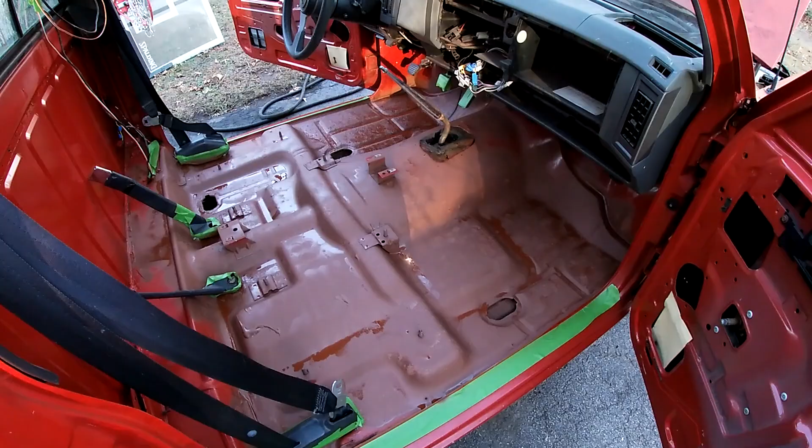I've got primer on. I'll let this dry up and then hit it with some paint and call it done. The floor is done, and it is pretty red, but it'll be covered by carpet. Not the same red as the truck, but it doesn't matter.

So this was a little bit of red I had left over when I did the Dart. I bought some different cans of red and this didn't match.

So I'm going to end this one here. The next video, I'm going to do everything needed to get this thing roadworthy. Until the next time, thanks for watching.